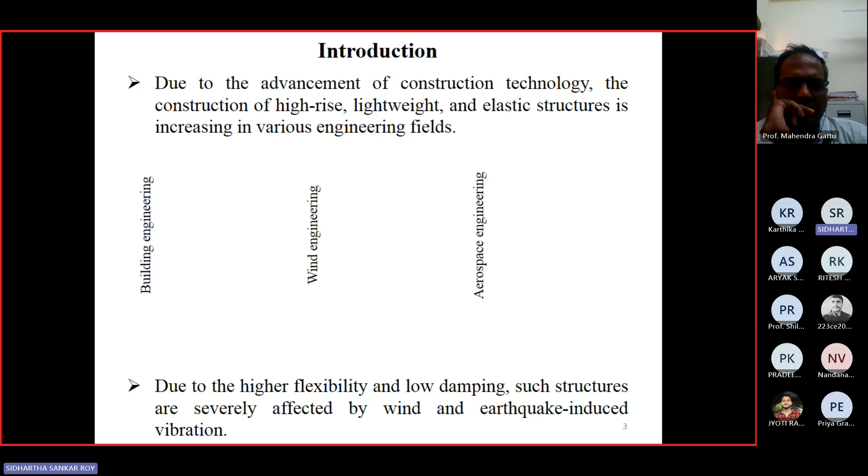Coming to the introduction, due to the advancement of construction technology and in this era of construction of high-rise and lightweight structures, elastic structures are increasing in various engineering fields. Due to the higher flexibility and low damping, such structures are severely affected by wind as well as earthquake-induced vibration. So different fields are here.

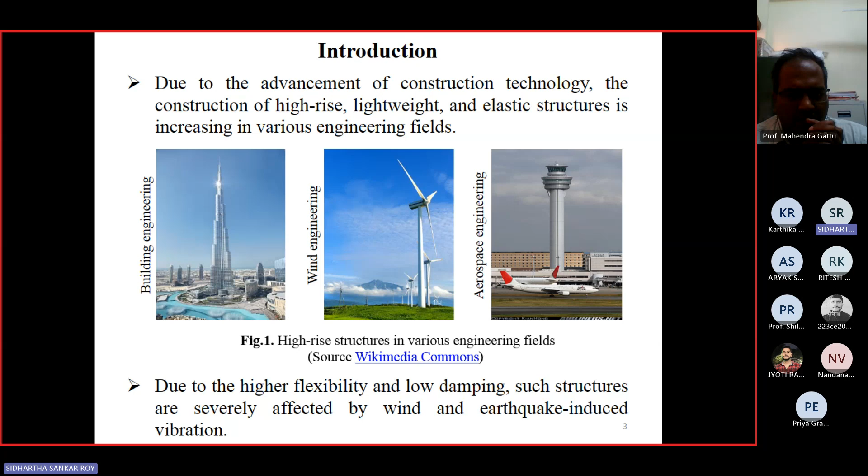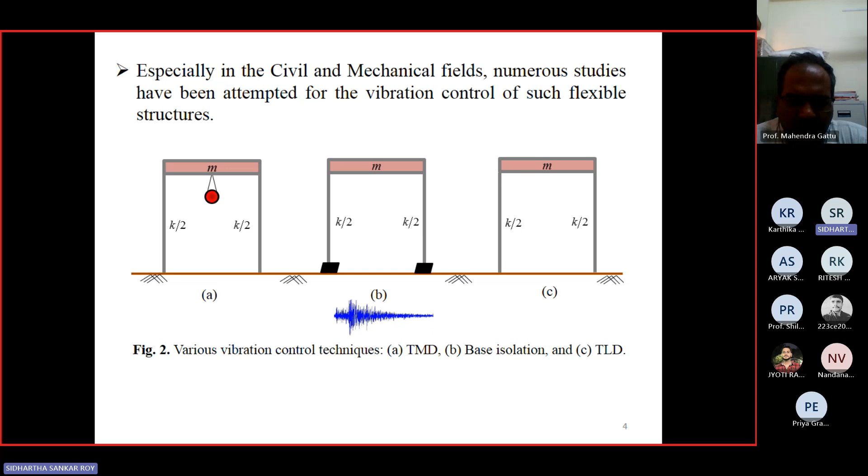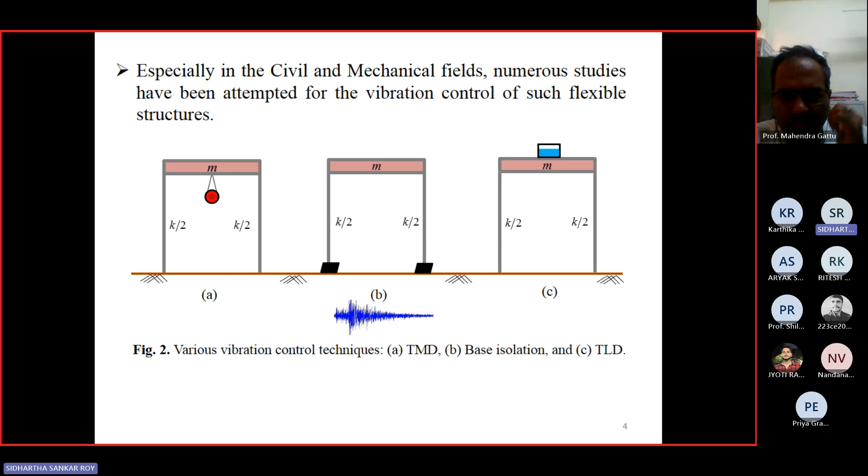And this third one, which is our matter of concern, is the TLD, that means tuned liquid damper, where the inherent energy dissipation ability of the liquid tanks is used as vibration suppressor.

Due to the design simplicity and low maintenance effort, tuned liquid dampers are an efficient vibration control among all these categories, because only the liquid depth needs to be maintained, and in most cases that liquid is only water.

So it is very economical, and also the main advantage of tuned liquid damper is it can be made over an existing structure, because normally base isolators and mass dampers have to be designed before the structure is built, and we cannot modify them, and many kinds of maintenance efforts are also required.

But this tuned liquid damper is a small rectangular or any kind of shape of tank that can be built over any existing structure.

So oscillation of the unrestrained free liquid surface due to any kind of external excitation is termed as sloshing. Sloshing means the oscillation of water. One can observe it from a variety of examples, like a glass of water.

If it is placed over a table and some certain kind of excitation is given to the table, it may slosh inside there, oscillate. That is sloshing, and it has an inherent ability to dissipate energy.

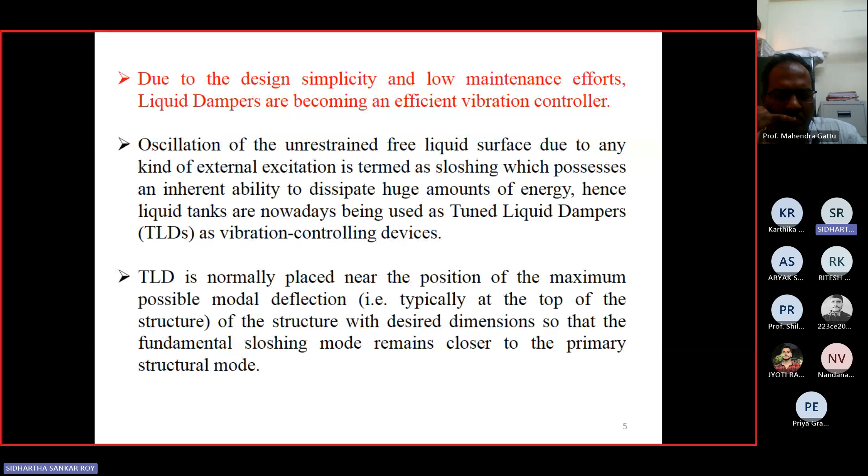Hence, tuned liquid dampers are nowadays a very much trending technology. TLD is normally placed near the position of maximum possible modal deflection, which is typically at the top of the structure. Any structure's maximum possible deflection is always at its top, so it is normally at the top of the structure that TLD is placed.

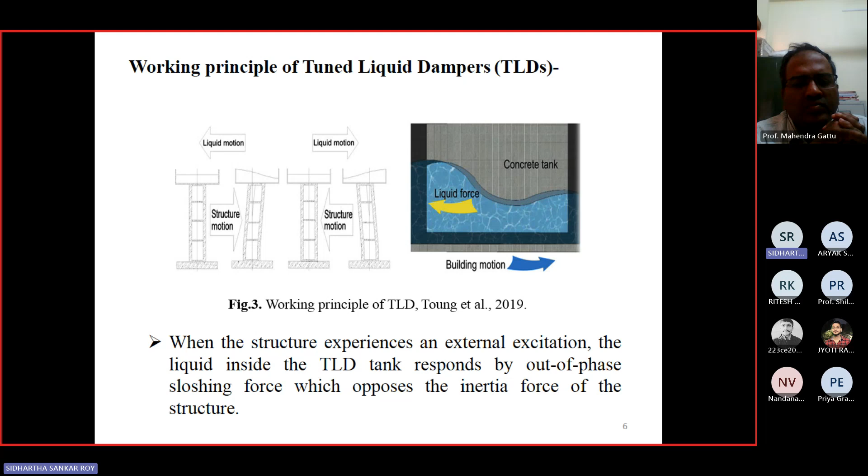This induces a hydrodynamic force on the wall of the tank, which is inherently transferred to its base and acts as a counteracting force. This is the main principle of tuned liquid damper, how it suppresses the vibration. It suppresses in a way that it remains in opposite phase of the excitation.

One is impulsive, one is convective. Convective means the more oscillatory part that will induce the hydrodynamic force mostly, and the impulsive part remains inactive, does not participate in sloshing, and behaves like a rigid mass.

More oscillation of liquid, more vibration control will be there, more energy dissipation will be there. So in our study, we are proposing a tank with modified bottom geometry with sloped walls, so that this stagnant portion will be removed.

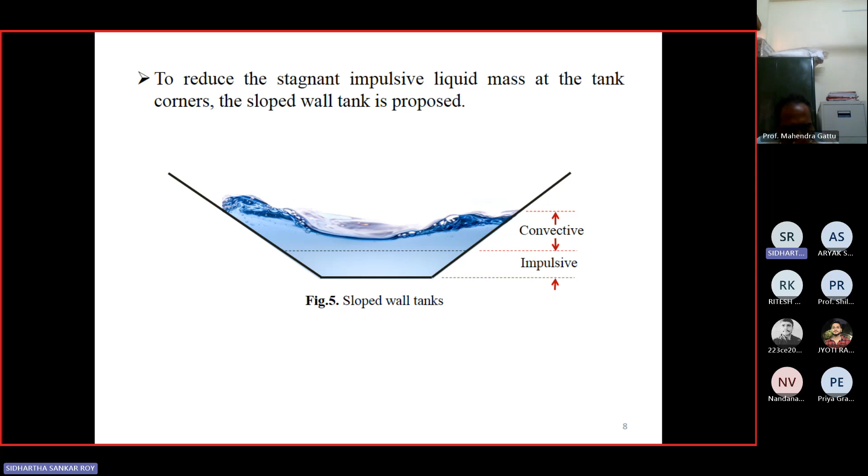So what will happen? The convective part will remain the same, meaning the oscillation part remains the same, and the impulsive part where the liquid gathers will be reduced. So this type of TLD is what we are studying.

The objective of this study is to numerically simulate the higher vibration control efficiency of the sloped wall TLD. Sloped wall is the name of that tank, maybe trapezoidal one also, but the wall configuration is modified, hence we are calling it a sloped wall TLD.

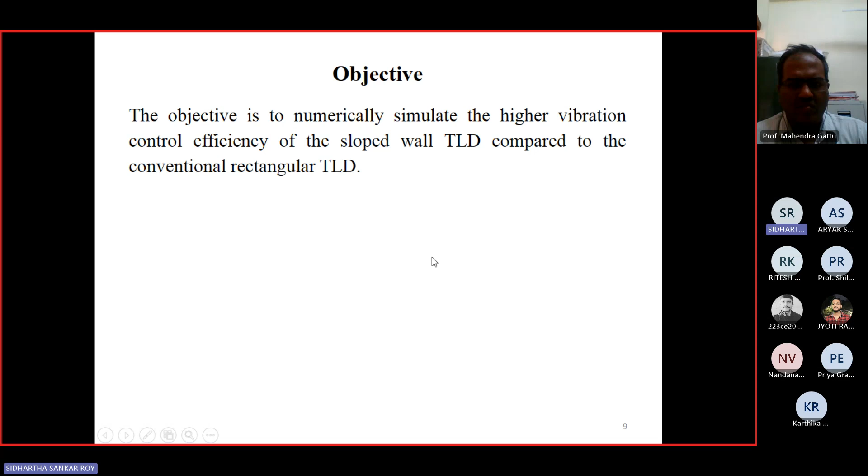Now coming to the mathematical formulation. The governing equation of motion inside the tank can be expressed as the velocity potential based 2D Laplace equation. This is the configuration of the sloped wall tank, and the boundary condition, the liquid depth, everything is here.

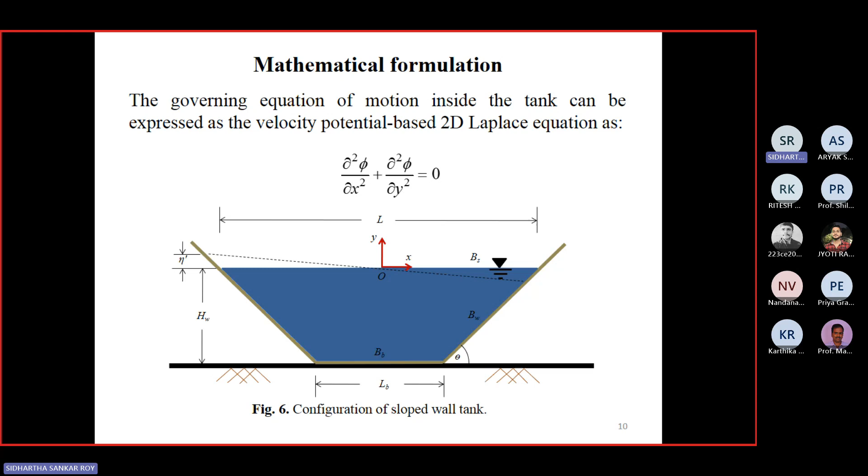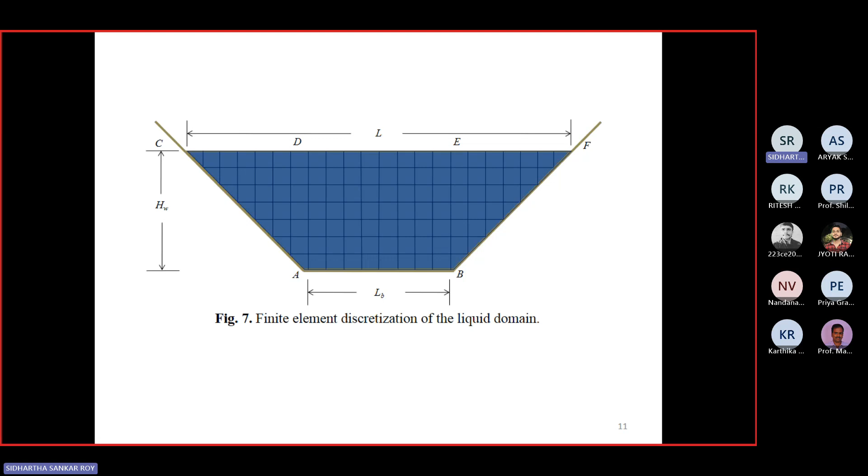Now we are using finite element method to analyze this type of tank. The finite element discretization is like this. We are using 4-node quadrilateral elements and 3-node triangular elements also to discretize the liquid zone near the sloped wall portion. This is a combination of these two types of elements.

By transformation and rearranging, and by applying boundary conditions to the governing equation, it takes the form of the well-known dynamic equation, where mf phi double dot, cf phi dot, kf phi is equal to force. It is the well-known dynamic equation, but here solving the sloshing problem.

So the elements of the matrix are: mf is the free surface matrix, cf is the damping matrix, and coming to kf, this is the liquid coefficient matrix.

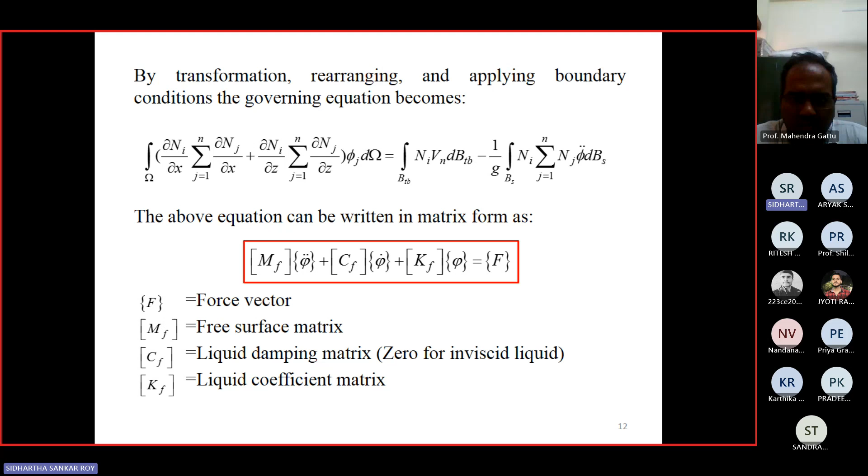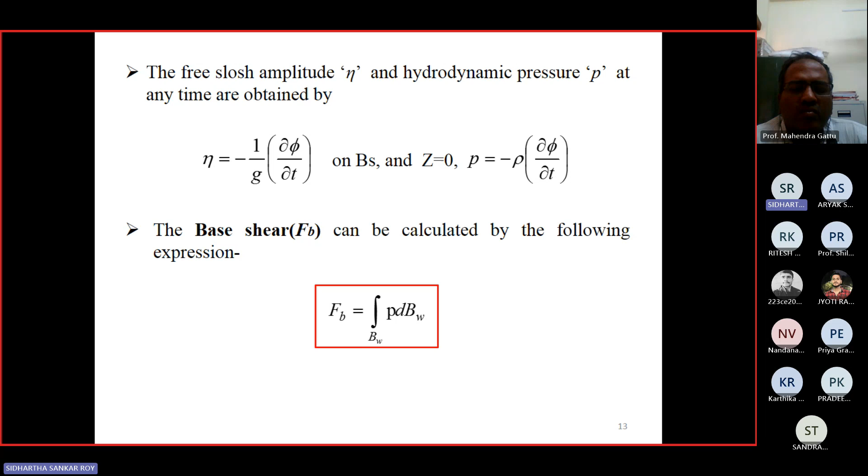Then solving this equation, the free slosh amplitude eta and hydrodynamic pressure P can be obtained by this expression. Finally, the base shear force, which acts opposite to oppose the excitation, can be calculated by integrating that pressure over the wall of the tank.

When the structure is subjected to external excitation, it will respond like that, and when a TLD is placed over that, it will respond in an opposite sense, which is the hydrodynamic base shear, and this opposing force will balance each other. So the equation of motion for the structure-TLD system can be given by this expression.

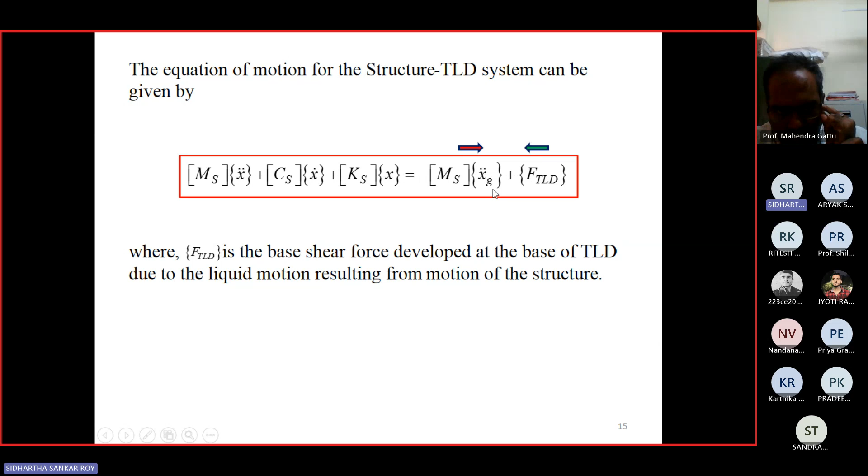One can observe that this is the inertia force of the building, ms x g double dot, meaning ground acceleration coming. If we take a case of earthquake, the ground acceleration will come and be multiplied to the mass, acting as the inertial force of the structure, which will be balanced by the F_TLD, the base force coming from the TLD tank here.

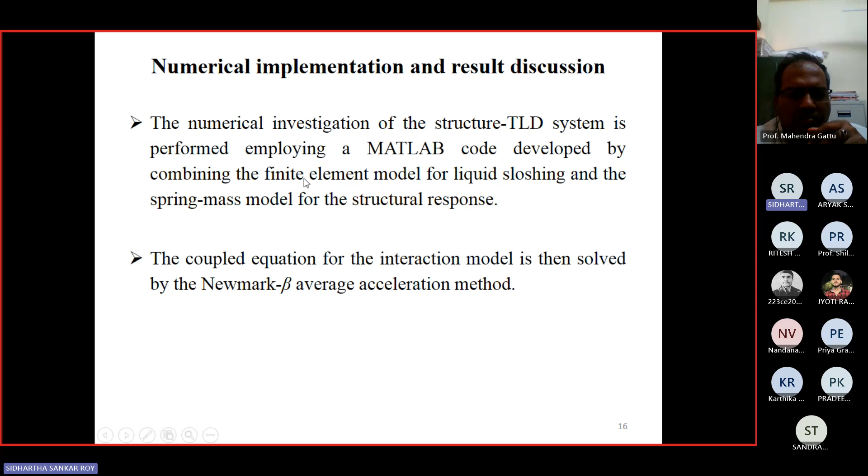So coming to a numerical example, we are developing our own MATLAB code based on the finite element model, and the coupled equation is solved by the Newmark beta average acceleration method.

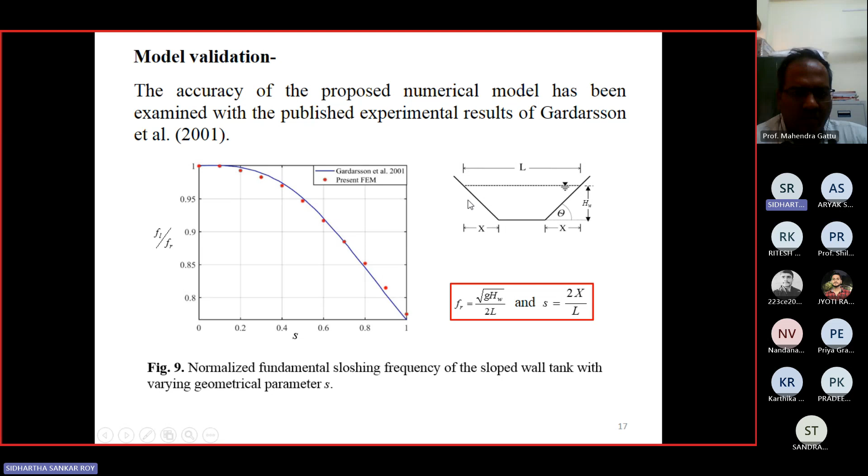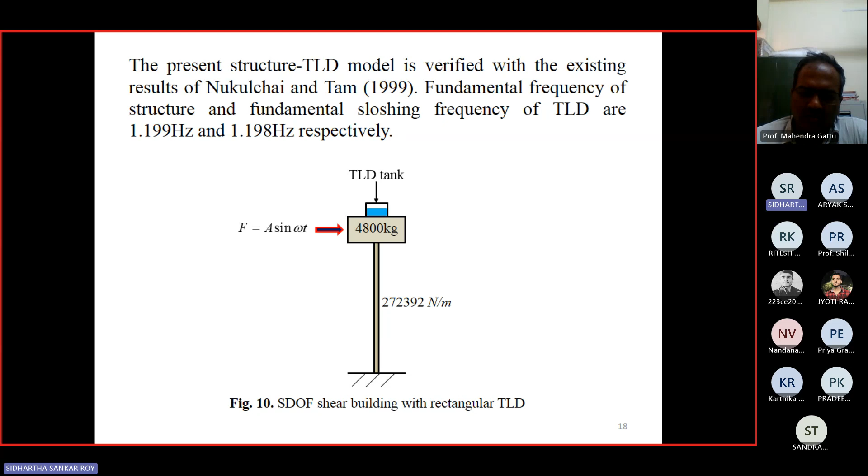Next, coming to the example, we are also validating our interaction model, because this one is only for the tank, and this one is for the interaction. That means a structure will be there, and a TLD over that structure, and we also examined the interaction. So F sin omega t, A sin omega t force will act, and the story force will act like this, and the response plotted over the existing result is found to be in good agreement.

Design parameters for this TLD, tuned liquid damper. Mainly four things should be noted. The fundamental sloshing frequency must be appropriately tuned to the fundamental frequency of the structure to maximize the performance of TLD. The name tuned liquid damper shows that it is tuned to something.

Tuned means it will be tuned to the fundamental frequency of the structure, so the sloshing frequency of the liquid and the structure frequency must be matched to get optimal vibration control. Then tuning ratio is presented as the ratio of the fundamental sloshing frequency to the fundamental frequency of the structure, beta R.

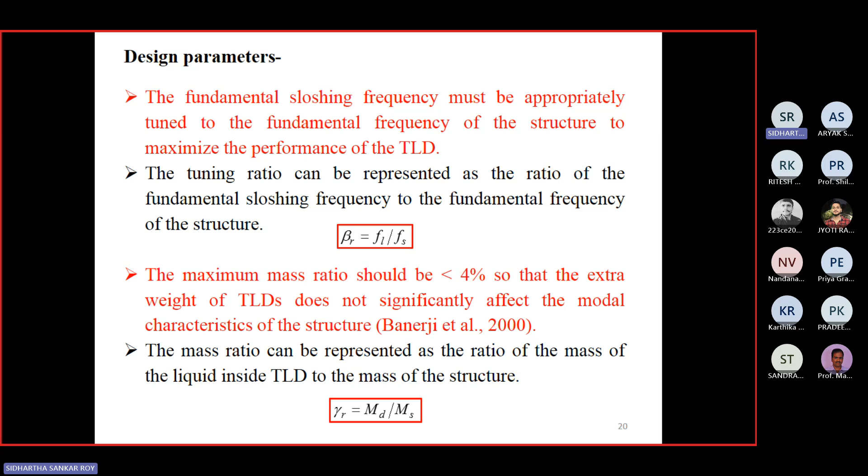Then the maximum mass ratio is an important aspect. Consider a case: the structure is 5000 kg and we place a 1000 kg water tank above it. That will definitely affect the modal property of the structure. So there should be a limitation, and that is less than 4%. The liquid tank employed as the tuned liquid damper must contain a liquid mass less than 4% of the total mass of the structure. This mass ratio can be represented as gamma R.

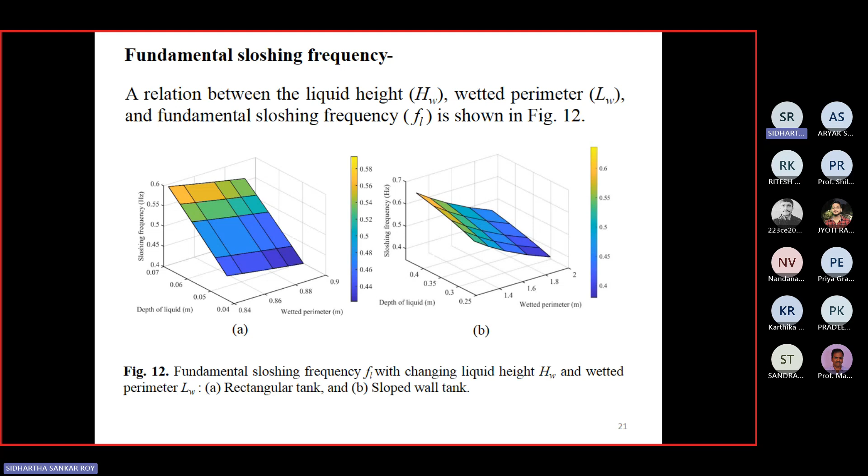This is a representation of the relation between liquid height, wetted perimeter, and fundamental sloshing frequency. On the left, A is for a rectangular tank and B is for the modified tank, that means a sloped tank. This is for a ground supported tank.

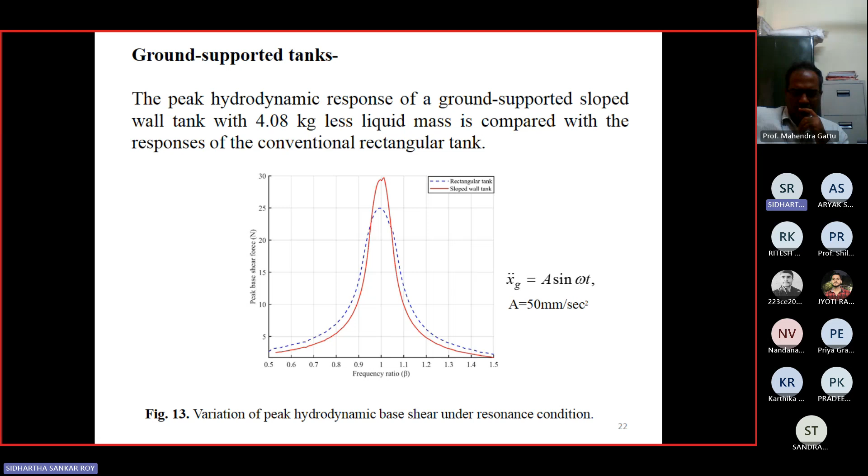One can observe that the peak hydrodynamic response of a ground supported sloped tank with 4.08 kg less liquid mass is higher than the conventional rectangular tank. That means the base shear near resonance is higher in case of the sloped tank compared to the rectangular one. But note that the water is 4.08 kg less, so with less liquid mass, a higher base shear is observed in case of this modified damper.

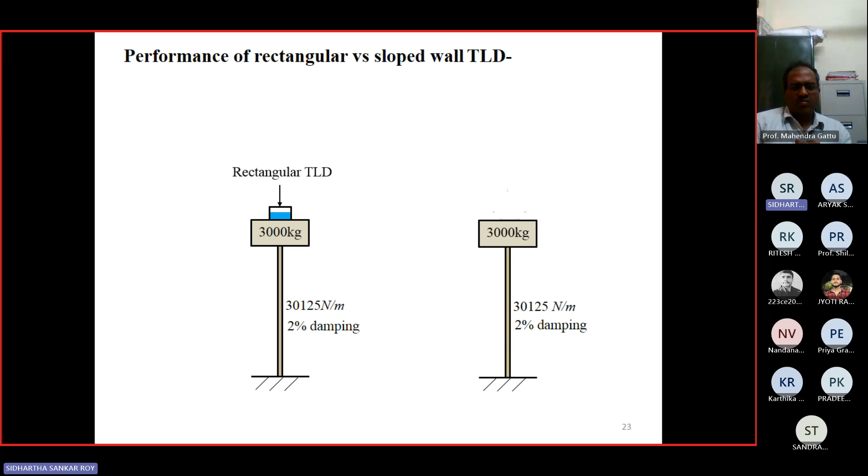So this is a comparison between the rectangular and sloped tank, to see whether it performs better or not. The same structure is taken with 2% damping, and these are the K and mass values, stiffness and mass. This is the rectangular tank, this one is the sloped tank. It is given a sin omega t, meaning sinusoidal excitation.

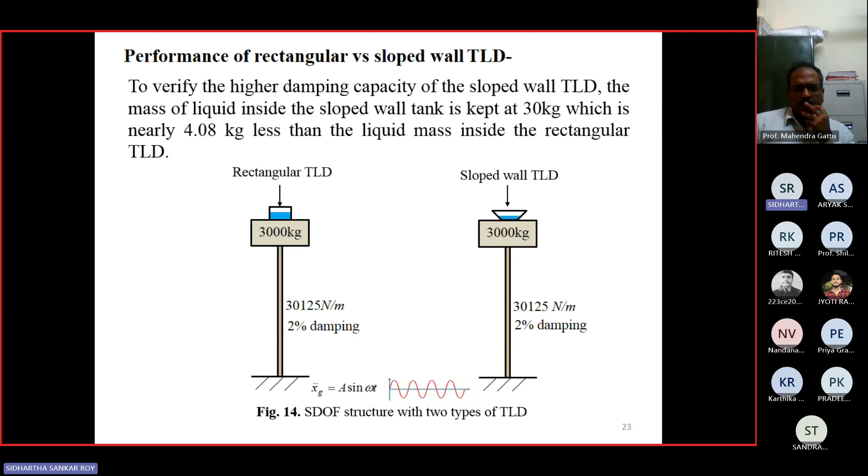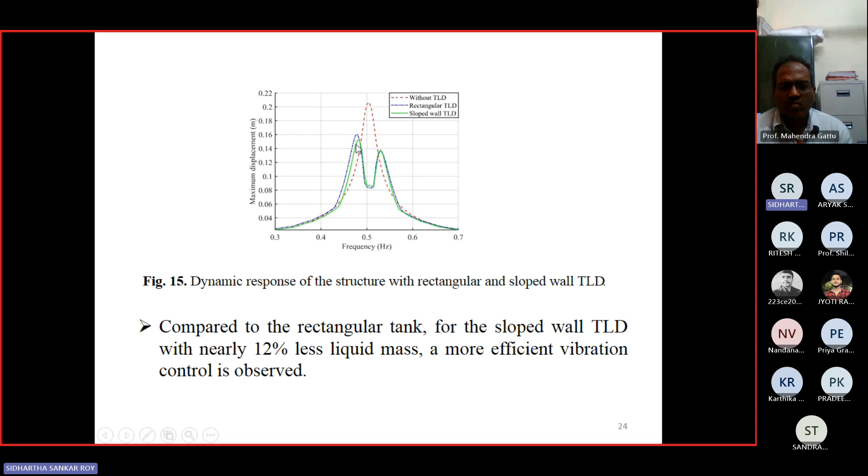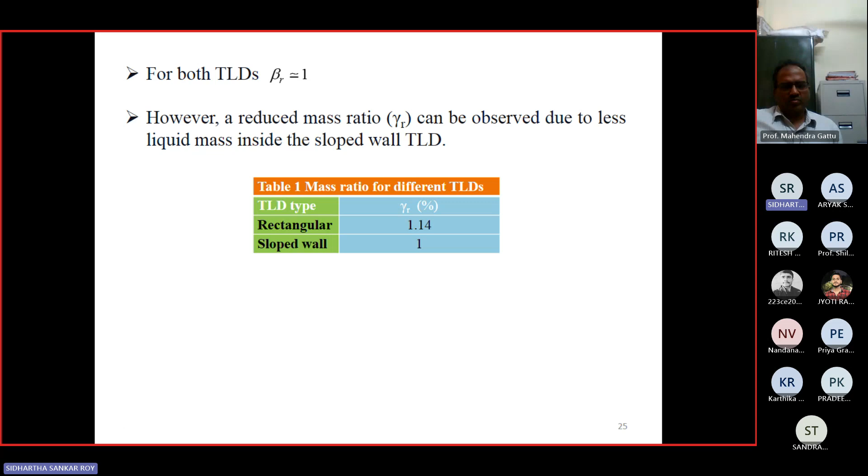One can observe that with the sloped tank, better vibration control is observed, because here the green curve is lower. So for both cases, beta, the tuning ratio, is the same, but a reduced mass ratio is observed. For the rectangular tank, the mass ratio is 1.14%, where for the sloped tank it is only 1%. That means with less load over the building, we get better vibration control, because additional mass means additional weight over the building or structure.

So this is the implementation of multiple sloped TLDs. As shown in the previous slide, it may be up to 4% or 3%. So only 1% mass ratio is considered here for one TLD, but we can increase the number of TLDs to increase the vibration control. So 1 TLD gives 1% mass ratio, 2 TLD gives 2% mass ratio, and 3 TLD may give up to 3% mass ratio, and that is allowed since we are using up to 3%.

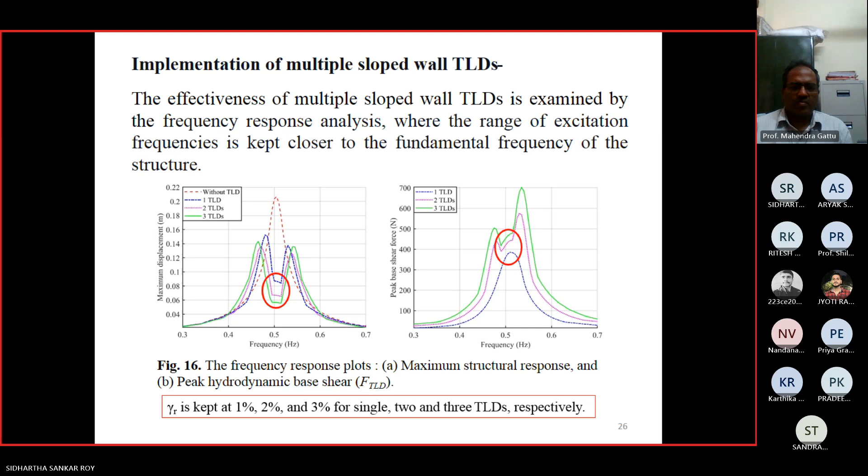One can observe that without TLD, this is the response. With one TLD, then 2 TLD, then 3 TLD, it reduces gradually. We cannot use more than 3-4%, because that is the limitation of the mass ratio, and beyond that it will affect the structure's modal property itself. So this gamma is kept at 1%, 2%, and 3% for single, 2, and 3 TLD respectively.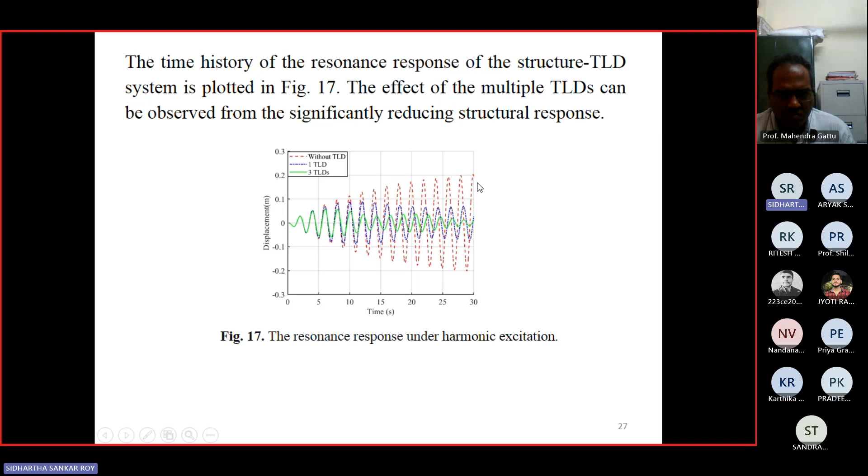This is the time history plot for without TLD and with TLD, for 1 and 3 TLDs. One can observe this is the resonance response under harmonic excitation. A 30-second time history plot is shown, where the displacement of the structure is more when there is no TLD, and with 1 TLD it is reduced, and with 3 TLD it is reduced even more. So coming to the seismic response, these were the harmonic responses we discussed, and now we move to the seismic response.

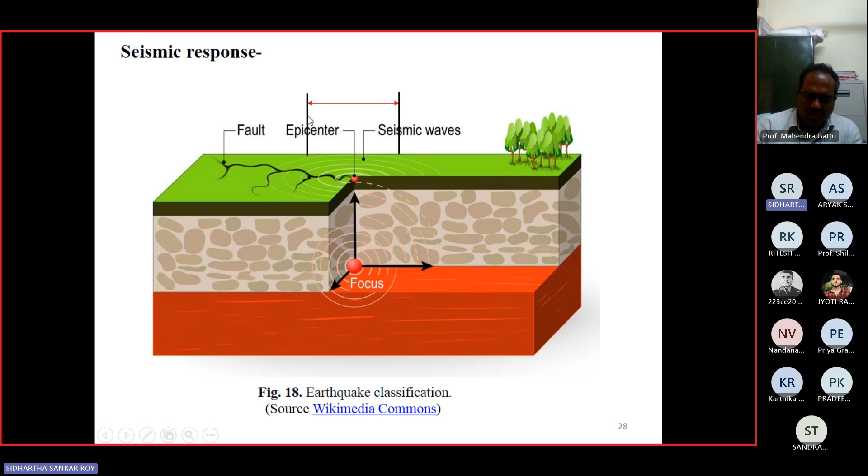One can observe that earthquakes may be classified depending upon source-to-site distance. If there is a focus of earthquake, an epicenter, a fault, and the structure or recording station, then if that is within a 20-kilometer range, that earthquake will be near-fault type. If higher than 20 kilometers, the same earthquake may be classified as far-fault earthquake.

So we are studying the influence of near-fault and far-fault earthquakes on the vibration control efficiency of this special type of TLD. These are two real earthquake ground motion data: one is San Fernando and one is Cape Mendocino, and these two are scaled to 0.2 G, meaning scaled to a particular acceleration value so that we can compare the results.

With allowing these two types of excitation to the structure, these are the responses. This is the displacement under San Fernando earthquake, which is the far-fault record, and this one is the near-fault record. One can observe that the structure is more vulnerable to near-fault records with higher displacement.

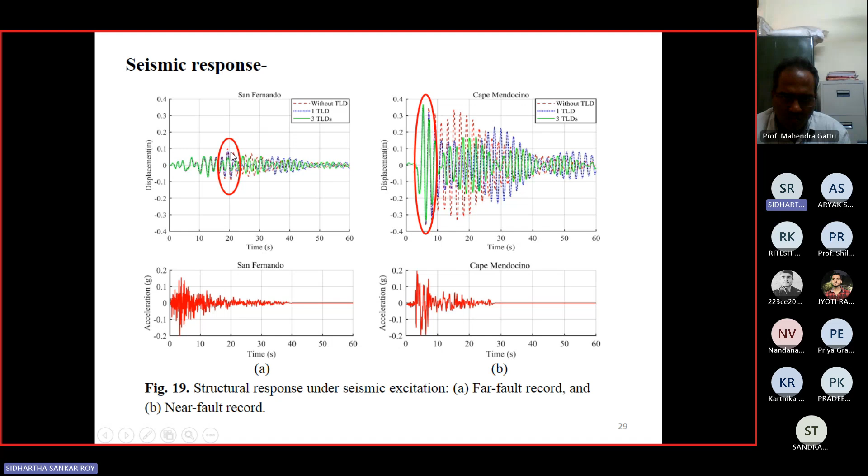One can also observe the effects of the tuned liquid dampers here - this is 1 TLD, then 3 TLD. With increasing number, the response is reducing, because the green one is the more controlled response. These are the peak responses here. From this plot, this is the peak one, and this is well mitigated by the application of the TLD.

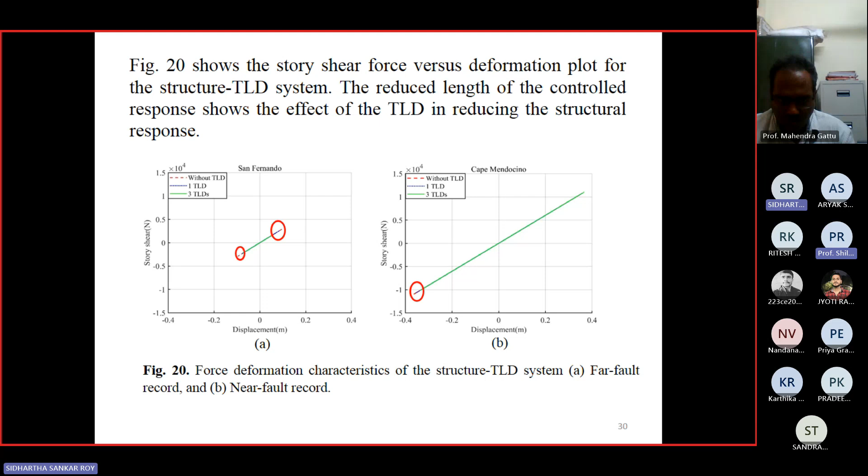The fourth remark is that compared to a single tuned liquid damper, more efficient seismic control can be achieved with multiple TLDs. Instead of using only one TLD tank, one can increase up to 3% or 4% maximum, and increasing the number of TLDs will definitely reduce vibration more. In some practical examples, such as in Japan or Taiwan, they used a single TLD only, but after that they installed more, increasing the mass ratio up to 3%, sometimes 5%, and that was found to be more effective compared to a single one.

Sometimes this may also have a negative effect, because in some studies it is observed that increasing the number of TLDs increases the mass, and if additional mass is there, there will be some change in the fundamental frequency of the structure. If that change brings the fundamental frequency close to the dominating frequency of any earthquake, that may have a negative impact. If coming closer to the dominating frequency, then the response will increase instead of decreasing.

This is also a good observation from some good studies, that show the negative influence of this as well. But in the current scenario, high-rise structures are more flexible, having a fundamental frequency that is very low, sometimes less than 1 Hz, and there this type of vibration suppressor is more effective compared to low-rise buildings.

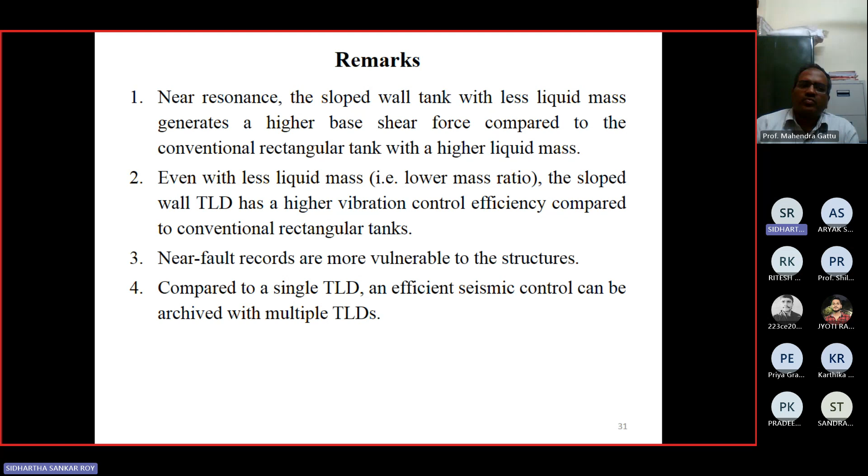This is only applicable for buildings of around 4 or 5 stories or more. If a building is below 5 stories, base isolation systems may be used, or any kind of viscous damping system can be used. So these are the remarks, and these are the references of the presentation. Thank you.

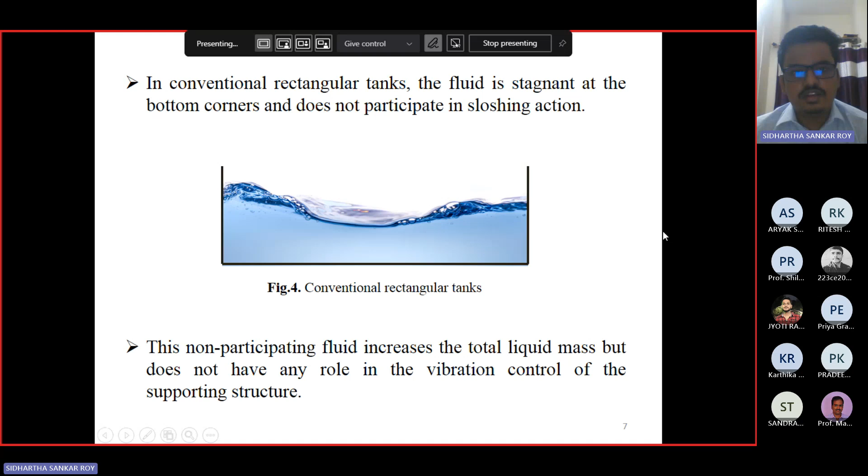Yes, it's visible. So actually, sir, convective and impulsive are two theoretical depths of a particular type of tank. If the total height of the liquid is like this, from this to this, it may be divided into two parts: convective part and impulsive part.

Convective means the more oscillatory part. That means those portions of the liquid mass which participate in sloshing - the more dynamic one. And normally it is closer to the free surface.

Below that level, another layer will always be there which will never move. It will behave like a rigid body, and it will not create any hydrodynamic force either. That part is known as the impulsive one, and the liquid mass inside that layer is known as impulsive liquid.

And the liquid mass inside the convective zone is known as convective liquid. The overall hydrodynamic performance of shallow water tanks is dependent on this convective part, because the impulsive part is not in motion - it behaves like a rigid body, stagnant in the bottom corners.

So what you're saying is that the impulsive part will have only inertia. Yes, inertia - there it will have only inertial force, and only the hydrodynamic part somehow exerts some pressure. How do you differentiate this inertial force from the hydrodynamic force?

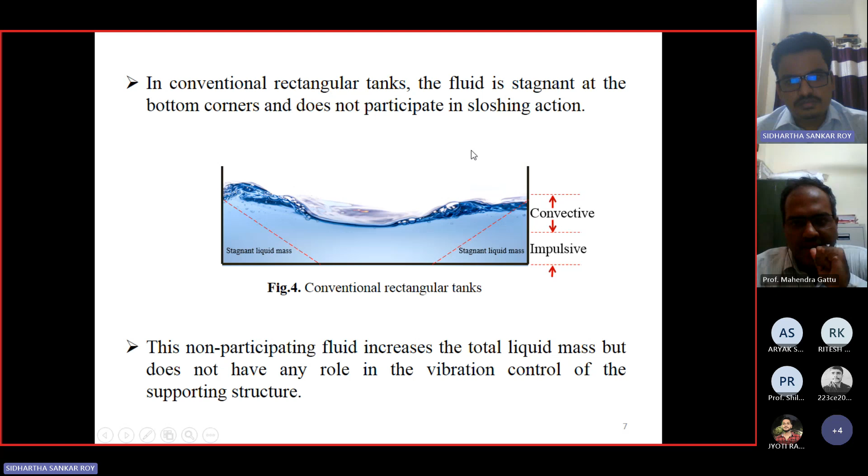Is this hydrodynamic force dependent on the acceleration - is it related to m times x double dot, or is it something else? No, sir. Actually, this hydrodynamic base shear we are calculating - that means the liquid force at a particular time instant.

We consider the time instant delta t. So there will be a pressure on both walls, left and right. Then the algebraic difference will act at the base. We are assuming that is the base here of the tank.

So we discretize this liquid domain into several small finite elements, and in the zone closer to the wall we distribute the pressure at each node, which is summed up and acts at the base. Some portion of the impulsive part also gives some pressure, but that is very minor - most of the hydrodynamic participation comes from the convective part for shallow water tanks.

If the depth is more, like in a cylindrical tank, there will be more impulsive part and very little convective part.